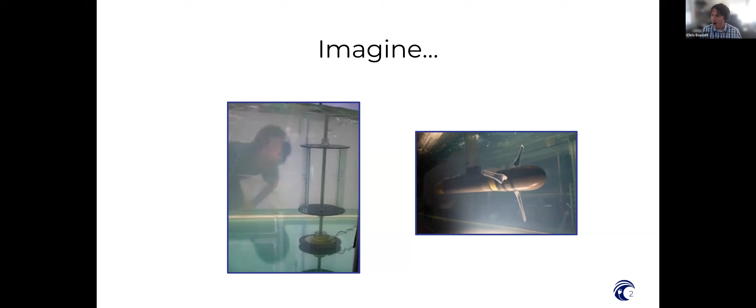Okay, so not a lot of time to think about what's a really big project, but I'm taking a few seconds here to take my own notes and think about what occurs to me. As we move through this, hopefully you can think about what you got right, wrong, what that tells you about your experience in these sorts of projects. So I'm going to do this in three chapters, thinking about the road from this concept, taking that idea and getting into operations.

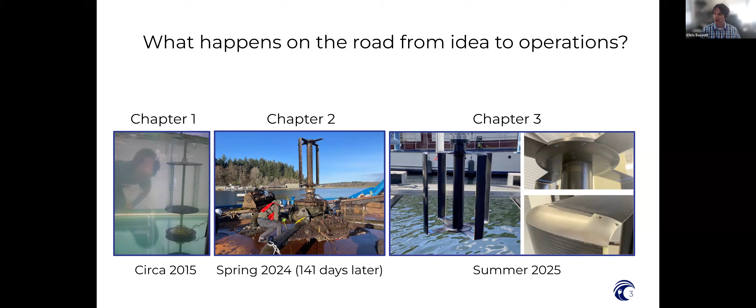And transition them to what we hope is a better performing system that we hope to deploy. I'm going to do this with more random stories and not get into a couple of technical details, because my goal here is to encourage especially some of the earlier career folks to think outside the box, maybe not as much about marine energy and performance, but all the other things you need to learn and carry with you as you execute on these projects.

So stepping back, chapter 1 is really all about this timeline. Around 2014, 2015, over a decade ago, Brian Polagye's team, grad students Ram Cavagnaro, Dom Forbush, Hannah Ross, Ben Strom, and probably others I'm forgetting, were basically in the lab working on cross-flow turbine hydrodynamics. And someone, I wasn't around for this, proposed the idea of doing a proof of concept demonstration.

This is really about the story of how that happened and what the timeline looks like and what surprises you see along the way. This image on the left is a newer picture, but shows a cross-flow turbine experiment in the lab. We started with that concept roughly around 2015, and the subsequent five years were spent developing that concept and aspects of the design, performing a site assessment to figure out the right place to do the work, and beginning to fabricate this stuff.

By the time mid-2020 rolls around, the project's in decent shape. Most of the components are in place. Other components remain to be fabricated, but there hasn't been a lot of testing of the system. So that's going to come in the subsequent years.

Around late 2021, we're in pretty good shape. We're ready to go to the field fairly quickly once we get our permits. Unfortunately, the rest of that timeline takes us a couple years down the road, and we finally get to put this in the water in 2023.

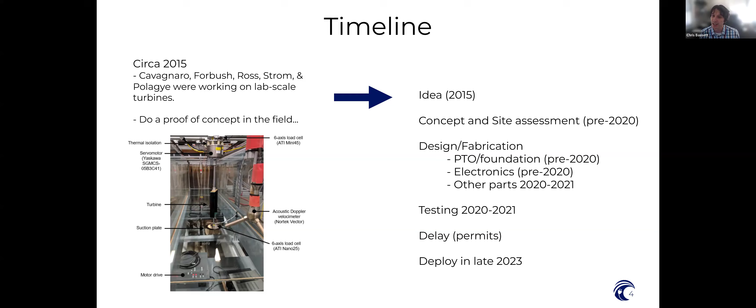So if you're a grad student now, and came up with a concept, you might be able to move more quickly than this, but I'd keep a timeline like this in mind. You're talking many years before you're reasonably going to execute on this, for many, many reasons, and I hope to talk more about those now.

So the Turbine Lander is this. This is the object, test article, whatever you'd like to call it, on the Seahorse, which we use to deploy the unit. It's creatively called the Turbine Lander, because it has a turbine centered in the middle, this four-bladed cross-flow turbine, and it sits on a gravity foundation or bottom lander. This unit is about 4 meters on each side, and its height is about 2.7 meters above the seabed.

Basically all of the components needed to run this system are packaged up in various housings right here. In the back left corner, you see a white object with a bunch of parts on it - that's an environmental monitoring system, which I'm not going to talk about anymore today, but that was a big part of this project. What I'm going to say about the operations is very limited.

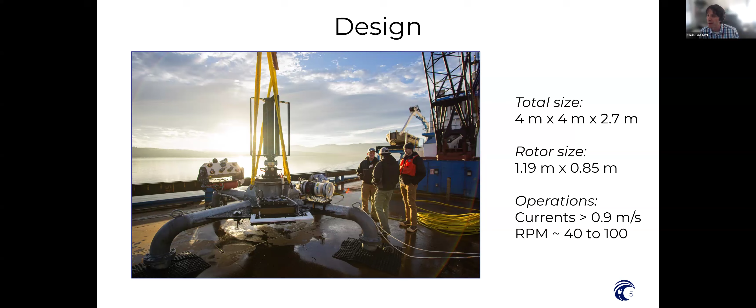I will note that we operated the turbine when currents at the site exceeded 0.9 meters per second. Under those conditions, the speed at which the rotor spun was about 40 to 100 RPM. So that's just to provide a bit of context for the operational characteristics of this unit.

So that's a very small amount of design detail about this. We're going to get into some more as we proceed here, but I don't have time to get into everything. If you're interested in the design details, constraints, and efforts to characterize this unit, they're described in a paper that is open access. In particular, if you're really interested in design stuff, the supplemental section, which is as long as the paper itself, really gets into the weeds on this. So if you find yourself looking for more, go find that later.

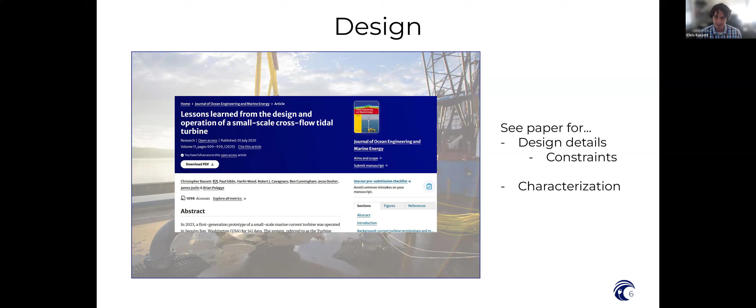Okay, so I skipped over a lot of the process here, and that's okay. We're going to dig back into that a bit later, but I want to talk about some of the unforeseen challenges you might run into as you try to take a project to the field.

Permitting was one particular challenge we faced - I'd say more of a time constraint than a challenge. Our work began in earnest to get the permits to do this work in January 2017, where the effort to deal with a biological assessment began. That was done with Cam Fisher at 48 North. That process played out, and we received a categorical exclusion, basically giving us most of what we need to deploy this device, in September 2022.

However, there was one remaining challenge on our hands, which was that the Washington DNR required an aquatic lands easement. So we filed our paperwork to do that, and eventually got that paperwork back in January 2023. Unfortunately, I cannot sign that document - that's above my pay grade. So our paperwork went into the capital projects office here at UW, where people wrangled over what to do with an aquatic lands easement, in an office where people normally spend their time thinking about acquiring land and building buildings.

There was a lot of emails back and forth about what this means and how this process works. Eventually, it gets signed, everyone is ready to go, and that's in June 2023. But with such a long project timeline, so many times I had planned to put this in the water earlier, only to have a new barrier come up in its place. So I decided, no more efforts to organize until I have all of the paperwork together. That happens in June 2023.

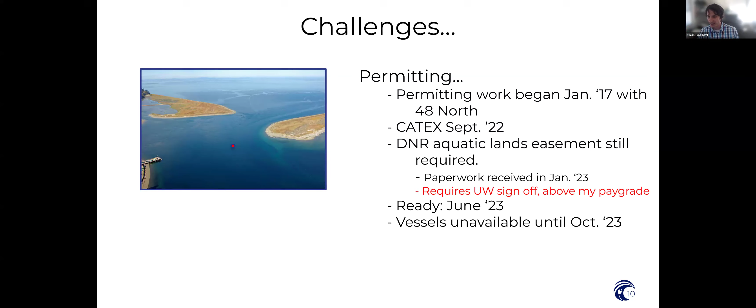I start making my phone calls to vessels to get this in the water, and I can't find anyone to deploy until October 2023. But the good news is that's when we finally got around to doing it. So that was exciting.

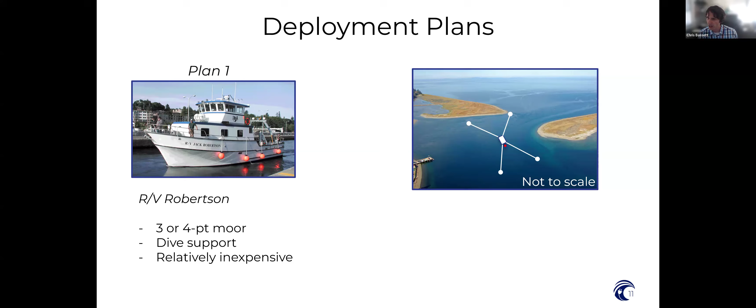Unfortunately, a lot of the discussions around this happened before I became PI on this project, and when I went to organize this, there were a lot of reservations about it. For one, there's a partially exposed cable on the seabed that runs nearby, and if we were going to put the anchors, the ground tackle down to hold the vessel in place, that would put that cable at risk because we could not avoid crossing it. So that's not great. On top of that, there were some operational concerns, and our local operators basically said, no dice, we don't really want to do this - can you go entertain some alternatives? So, short answer to that is yeah, but I wasn't quite sure what to do next.

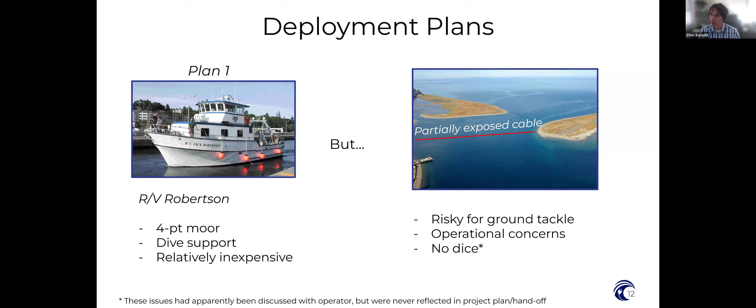Fortunately, people around here had some great ideas, and they recommended this particular vessel called Seahorse, which is a private vessel of a local marine construction company. It's basically a much larger barge, about 108 feet long, with a giant 20-ton crane on it that can lift a large load at far bigger distances than we could ever need. One of the real compelling reasons to work with this boat is it's a spud barge, or other people might have heard of a jackup barge - so instead of anchoring, this vessel has large spuds it can drive into the seabed to hold station, and it can use those to maneuver quite close to the spot where we want to be.

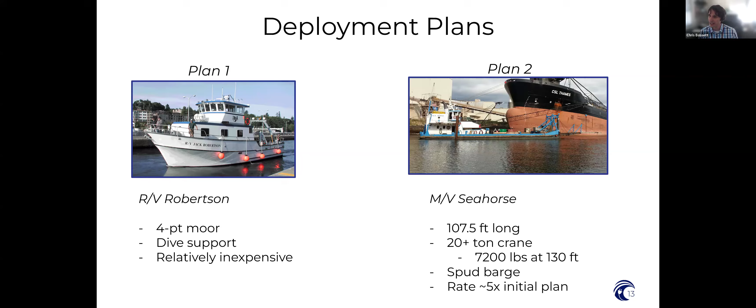So this vessel's great, super capable for what it is, but it's quite expensive compared to our local oceanographic vessel. And then, of course, we need to work around their schedules. Either way, Northern Marine was fantastic, interested in doing this work, and so we decided to do so.

So we had to make a plan, right? We're going to send our device, our Turbine Lander, up to Sequim Bay. And how are we going to do it? We decide that the most appropriate way to do this is to build the Turbine Lander, fully fabricated here on the dock at our oceanography department, because there's lots of space, there's heavy equipment there, and we have access to the power we need. And we can build that in advance.

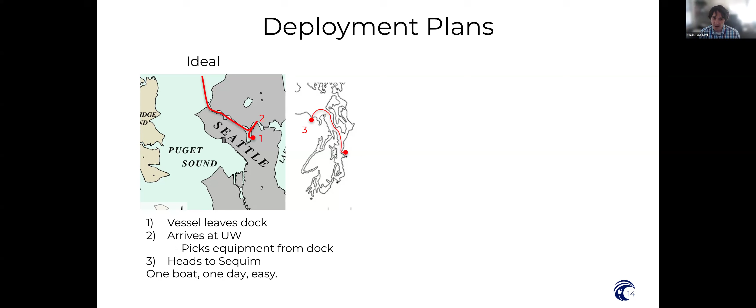And then the vessel will leave its point of moorage, which is in Lake Union, right nearby UW's campus, and it's just going to steam a few minutes north to UW. Using its giant crane, it'll just pick it right off onto the deck. From there, it can leave out from Seattle into the Puget Sound region, and based on the map on the right, drive up over to Sequim Bay there, and we can meet it. And that should all go nice and easy, no hiccups, right? Well, wrong.

The reality looks a lot different than that. So, the vessel itself...

While we were preparing for deployment and assembling this at the oceanography dock, less than a week in advance, I get a call saying we have a problem. Our vessel is too big to go in and out of the small lock. We have to use the large lock, and the Army Corps has announced a long-term closure to do maintenance. We're basically trapped out here for the winter because we're busy doing work for the Navy and can't make it back before they close. We need a new plan.

They asked, can you just take it apart and drive it up? I said no, that's going to be like a week of work, plus we've already tested the system or we're getting close. That's not going to work. We don't have time for that.

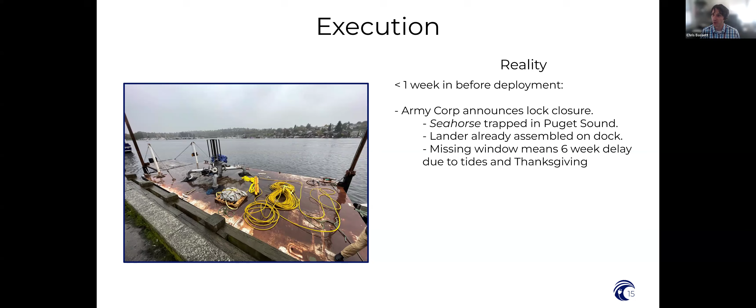If we miss our window, we have a huge problem because we don't have another opportunity where the tides are suitable, and there's not a holiday, for over 6 weeks. So we're going to lose 6 weeks of our deployment if we can't find an answer to this.

So we quickly figure out that instead of the original plan, they can send over a small barge. I contract with a local boom crane to come into the oceanography dock early in the morning, lift our equipment onto the barge, and transfer it there. Then at around 0800 we'll go out of the small lock with the barge to load onto the other vessel.

But the boat gets to the small lock after we do, and the small lock is broken. The pumps are not working, so they can't get the vessel out.

It's dumping rain this morning, very cold, and this vessel has no interior—there's nowhere to hide from the rain. So the poor crew is just sitting on this vessel getting poured on in cold weather for hours, before finally they make it through the locks midday.

They're able to perform that equipment transfer at sea and get the vessel up. As you can probably imagine, this is all very stressful, done on short order, and none of this is a planned part of the budget. So that's just what happens when you do field work, maybe.

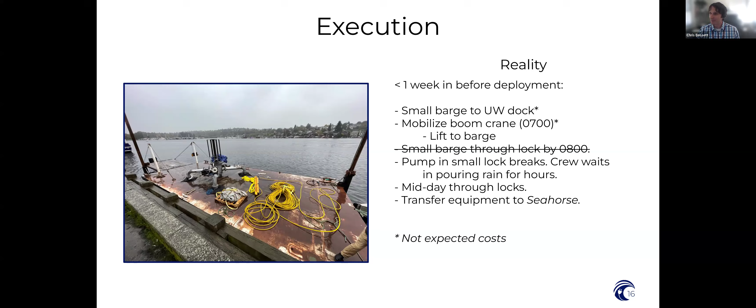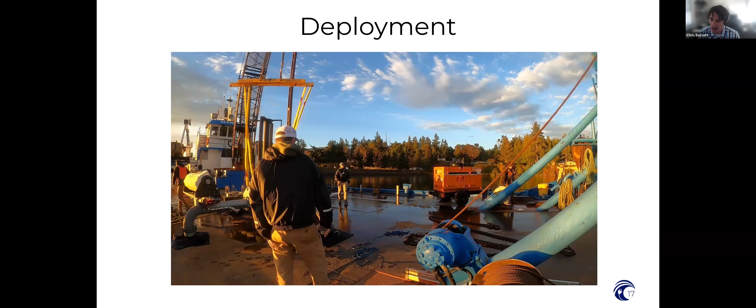Either way, we did successfully get our equipment up, and the following day we were able to deploy our equipment in Sequim Bay. So in the morning we're all ready to go and we pull up anchor. Here on deck, I have the Turbine Lander ready for deployment.

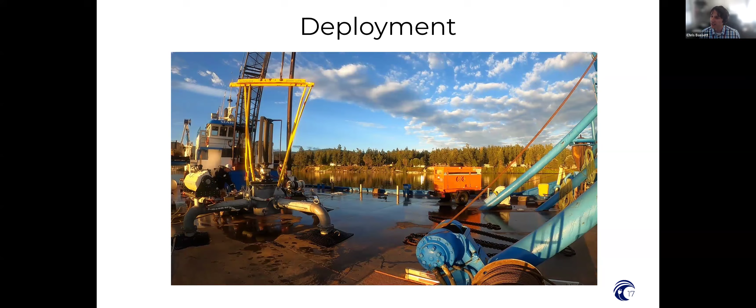We would come up with something maybe more complicated, but the water up there is actually quite shallow, only about 8 meters deep. So we can basically pick the Turbine Lander right off the deck with some slings and a load spreader and send it down to the seabed, and we want to secure the cable on the site anyway.

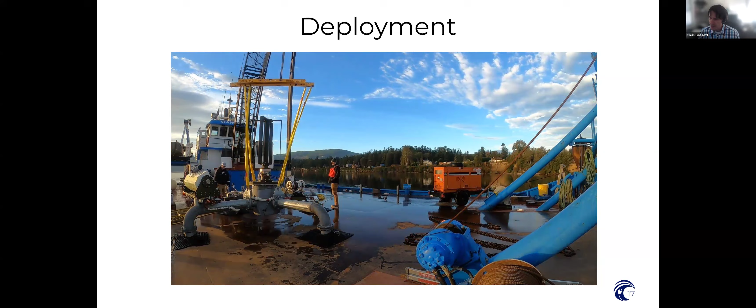So we want to send divers down, and we might as well just have them unshackle our equipment once we've tested it and we're comfortable with it on the seabed. So here we're just preparing to put this in.

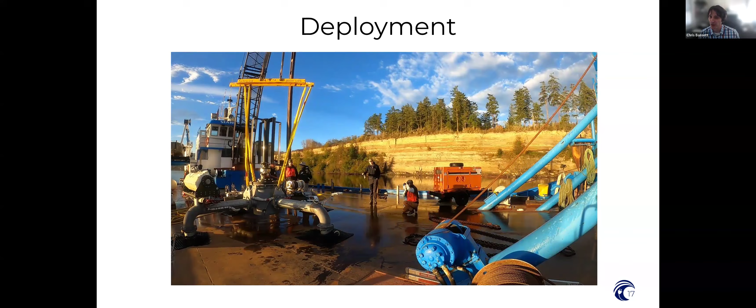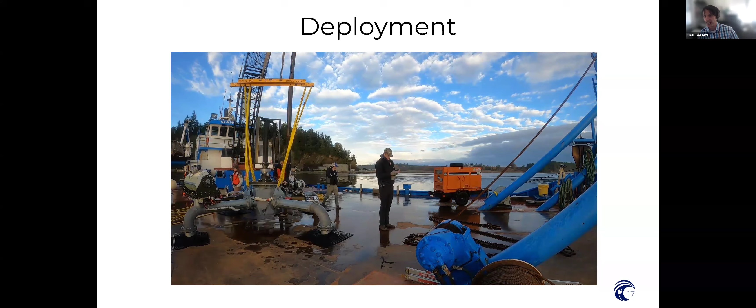We were in the interior of Sequim Bay in the morning, and this is the vessel basically just heading out to the site. That's PNNL's facility in the background. We're just preparing to get this thing in the water and doing all the things you do when you're ready for an operation.

Now we are on site, and our job here is quite simple: we just want to set this thing down on the seabed. So it's all rigged to be picked up.

But one of the things we wanted to do is make sure the environmental monitoring package, shown on the very left side of the foundation here, is oriented perpendicular to the direction of the flow.

So we sorted out to have another vessel come in with a large tagline and take some tension on that tag as we lower the vessel down to the seabed, so we can get that orientation of the platform right on the seabed. Pretty crude approach to it.

It turns out it worked really well, at which point the cable, which is on deck here—about a 160-meter cable—basically gets spooled out back to the facility, and divers go down and secure it to the bed.

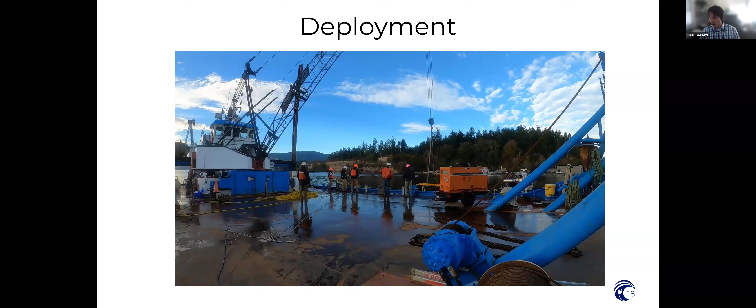All of our equipment remained comfortably in position following that for 141 days. So there you go, that's a pretty quick idea of deployment operations and some of the unsurprising things that happen.

They are unsurprising, but unexpected. So here's one of the only looks of data, actual power generation data I'm going to provide from that, because I want to focus on lessons learned and what we did next.

So the top figure here is current measurements for a good portion of that deployment period, and the y-axis is the inflow velocity at hub height. What we see is it's fluctuating down and up several times on a daily basis, and showing these broader temporal patterns associated with the spring neap cycles.

Key here is that the peak velocities at the site are about 2 meters per second, a little bit higher at hub height. This bottom figure here just shows the power, electrical power generated by the turbine throughout the deployment period.

Note that not all the powers are positive. A negative power means we're providing some power to the turbine to keep it moving, and this is actually happening quite often. The reason for that actually makes a lot of sense, I think, when you think about it.

We'll talk about it in a minute, but we went through pretty extensive characterization of the turbine before we put it in, and at that point we had realized some of the inefficiencies in the system that could be addressed with the second generation system.

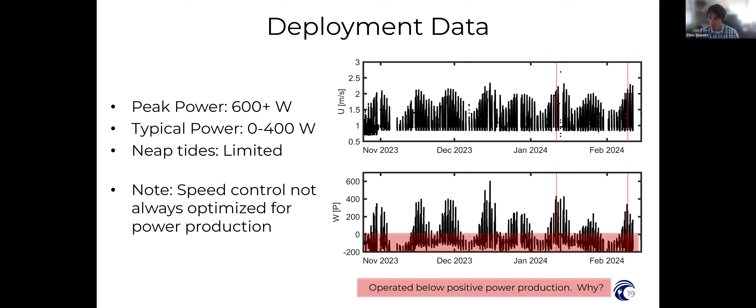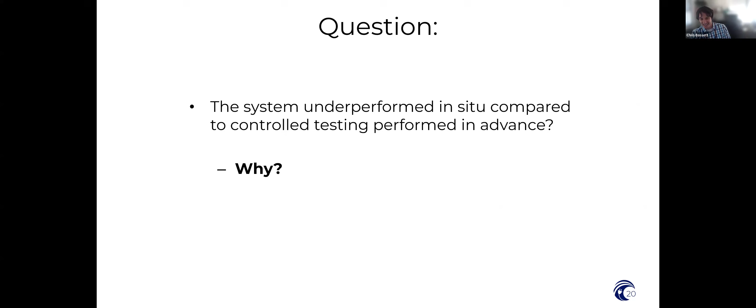Okay, so another quick prompt here. I'm going to give you a few seconds to think about this question: our system underperformed in situ when it was deployed compared to control testing performed in advance. Can you come up with one or several reasons why you think that might have happened? Then we're going to talk through it. I'm going to give you 15 seconds. Okay, cool. Sorry, I know that's not that much time, but it's worth taking a second just to think what might not be going the way you expected, because some of it was surprising to us.

Biofouling was the first real big challenge we noticed, and we noticed it within 48 hours. We had cameras and could view the system in real time, and we noticed very quickly that we were having several problems. The first was eelgrass was getting caught in the blades and basically the blade assembly.

There were some small cracks in it, and those were basically large enough, even though they were less than an eighth an inch, for eelgrass to get caught in there and turn the blades into sort of like bearded objects floating around. That's not helpful.

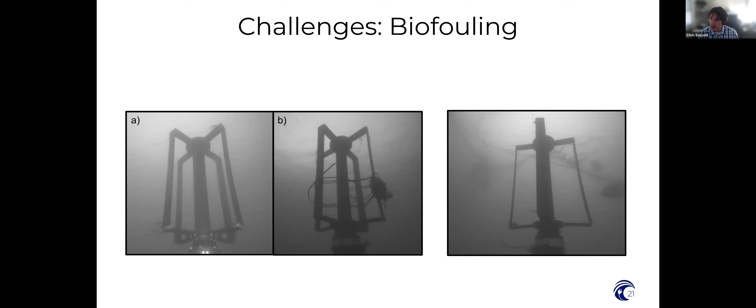These examples where kelp got trapped around typically would come off within a tidal cycle, but these examples where eelgrass got stuck, it would stay there for quite a bit of time before it would come off. And so biofouling, you can imagine all that plant matter out there is really interfering with the hydrodynamics, creating extra drag and reducing the performance. So how do we determine that? What do we try to do to figure out what the impacts are?

Lacking other good options, the approach we took was to find a period where the rotor is not fouled, and currents are basically zero near slack tides. We would step through a set of RPMs and measure how much power it took to drive the system when it wasn't biofouled. Then we would repeat it when there was fouling and compare the two to see what the net difference in power requirements was.

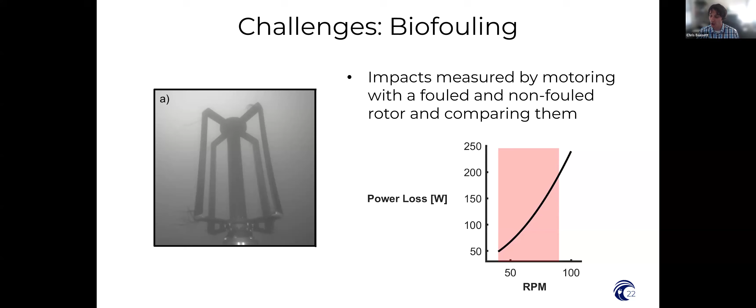The short story is that even in moderate cases of fouling, we see 50 to 200 watts, depending on operating condition, chewed up just by the presence of the plant on the rotor. That's not great when the target average power output for our turbine is on the order of 100 watts. That's a significant loss. So biofouling definitely interfered with us and motivated us to make changes going forward.

Another significant challenge we had, and this might be my most technical slide, is turbulence. On the left here we have a pretty typical measure for the performance of a rotor. The y-axis is the coefficient of power, and the x-axis is the non-dimensional rotor speed. The coefficient of power is defined on the right: basically the mechanical power of your rotor in the numerator and the inflow power in the denominator, and this represents your rotor's efficiency.

One thing to notice about this particular curve is there's a peak right at about 2. If I move significantly off that peak, my overall efficiency drops rather rapidly. That should be a sign that a system like this is going to struggle with performance if you can't keep it operating at the state you want it to be in.

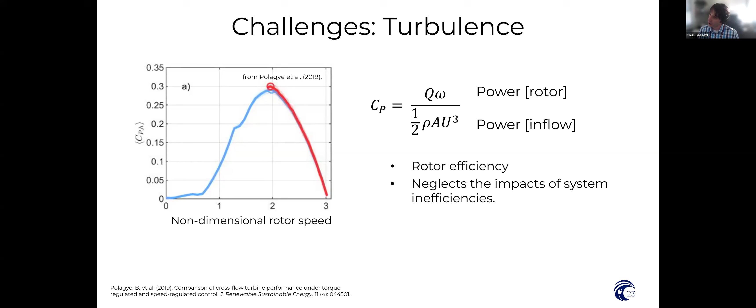My question is, if I'm trying to maintain constant control of the rotor, meaning it's moving at the same speed, what happens if my inflow velocity changes and I can't respond to it? It has great implications for our performance.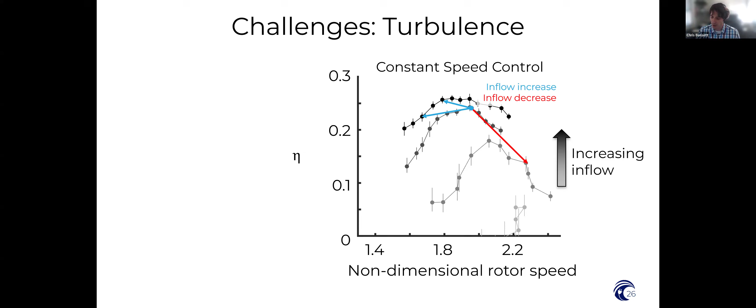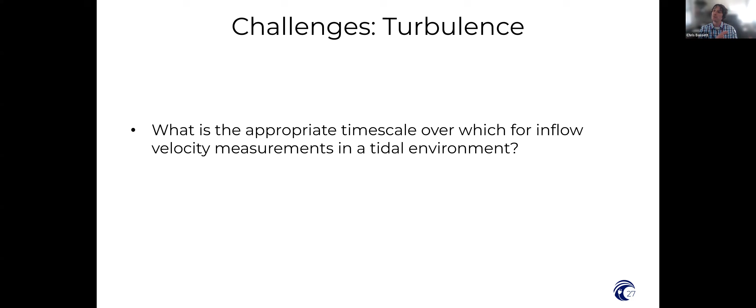When you're operating and trying to control a device, it's appropriate to figure out what time scale you need to use to control it. Tides themselves, in an aggregate average sense over 2 to 5 minutes, the mean currents don't change a lot, but there are turbulent fluctuations of varying timescales in the middle. If I could track those perfectly, that would be ideal, but it's really hard to do. If you can't do it well, you might always be chasing conditions that no longer reflect what the turbine is experiencing, and this is ultimately the problem we had.

This is 5 minutes of data. The top plot shows three things: the velocity on the y-axis, and the red line shows a 2-minute moving average used to control the turbine. The black and blue curves show 6-second averages, good enough to get a statistical sense of noise, but still capturing fluctuations in the inflow.

When we take those measurements, what we actually see here is these wild fluctuations in the inflow that are happening on the scales of seconds or under a minute. So we are not fundamentally tracking those velocity fluctuations.

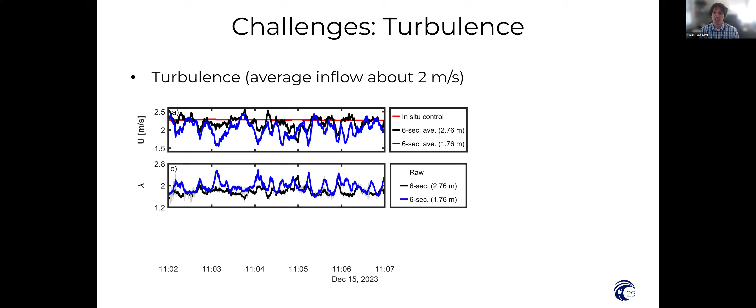This non-dimensional rotor speed, shown here in this plot, is optimized at about 1.9, which we hit okay with the upper part of the rotor, but for that lower part of the rotor in the inflow, it's varying wildly.

That means part of the turbine is just not operating that efficiently while we're out there. The end result is we end up with wildly varying inflow conditions that really drive variability in power production. If there's less turbulence, or we can track it, we can do well. But if we're just working off that mean flow speed and don't have a good way to account for that, we might struggle with power generation. This points to a need to change things to do better control.

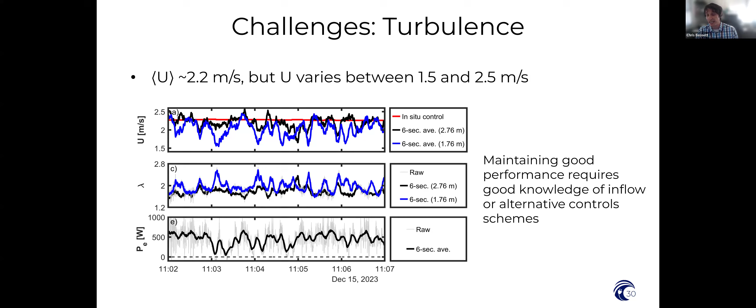Next challenge, mechanical losses. Before this system was actually deployed, we did some laboratory-based characterization to measure the assembly's friction of all the components — how much is being lost when we just spin it in the laboratory.

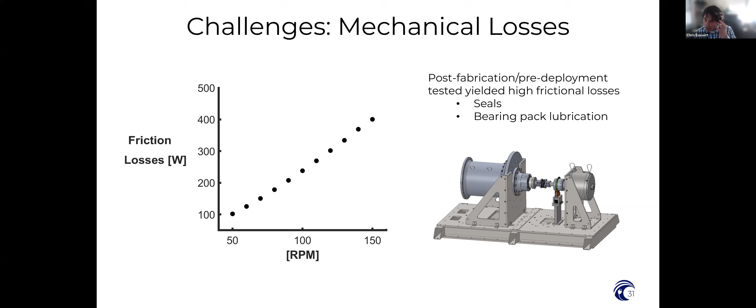So that's what this plot shows. Most of our operating space is covered by 50 RPM to 100 RPM. We're seeing losses associated with baseline friction on the order of 100 watts up to over 200 watts. That's not great. And those losses — the primary contributors are seals and basically the lubrication that we have in the bearing pack. So this is a problem we ultimately want to solve.

I'll get to it in a minute. But another challenge we identified was a blade failure, which I mentioned earlier. In this upper figure, I'm not going to get into too many details, but I want to point out we have this complicated assembly where we have an aluminum strut that comes in and attaches to the blade, which has a titanium hinge, and there's a pin that holds those components together.

And that pin is held in place by a fastener. So we had a blade failure. When we recovered the system, we didn't know what happened, so we wanted to do some forensic engineering.

The information we had available was that we'd been recording sound while we were out there, and we heard an impact. We know something, in the case of both events, hit our turbine and caused a lot of noise, but we don't know precisely what that was. When we dug through and looked at the blades that still existed and the ones that failed, we didn't see any telltale signs of fatigue. So that suggests something about the mode of failure.

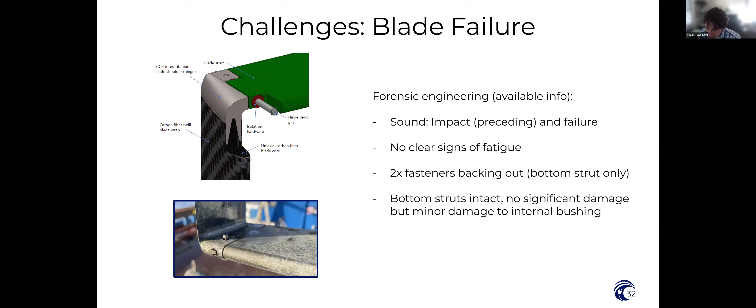When we recovered the system, we had two blades missing, and the bottom of both remaining struts — the fasteners that held the pins in place — had more or less backed out. Not a great sign, because if those back out, we lose our pin retention mechanism. And the bottom struts that were intact on all of the different blades had no significant damage, suggesting that the blades just came loose.

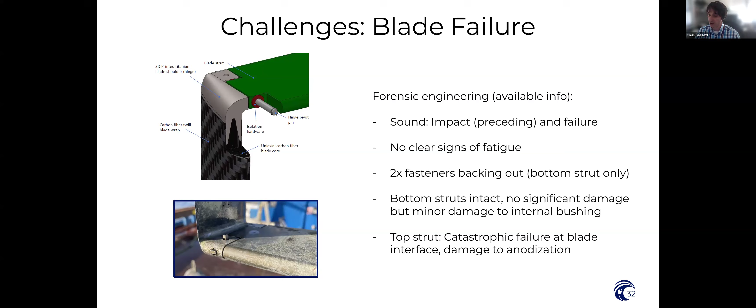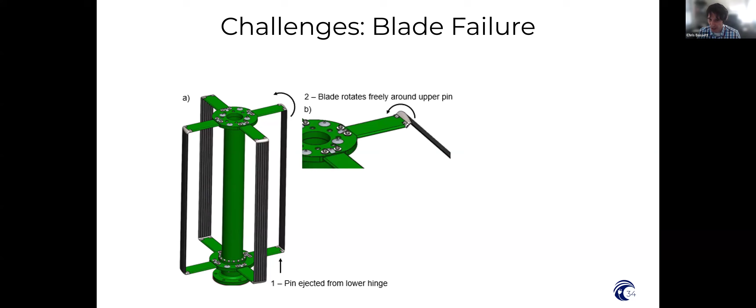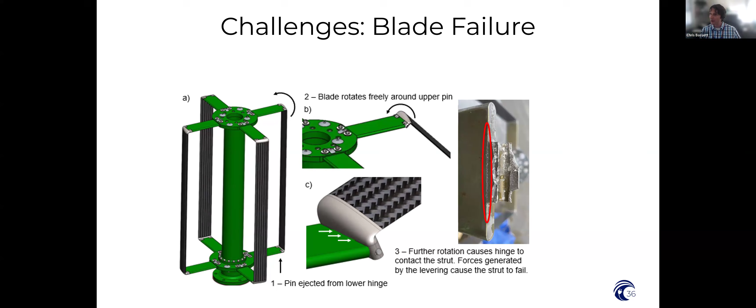However, the top strut had catastrophic failure, which I'll show next, and damage to the anodization. So the story we were able to pull together was that essentially, as shown here, the lower pin basically pops out of that hinge. When that happens, the blade is free to rotate up freely. Eventually it spins over enough, and the titanium hinge makes contact with the strut and cams the pin right out of the retention mechanism, and you get a broken strut that catastrophically fails and looks something like this. So, an interesting problem to have, something we will keep in mind for our future designs.

Okay, so I just spent a huge amount of time before I'm even at the next generation, but I think knowing what to do in your next generation, you have to understand what went well and what didn't the first time you went out. So our goals here are to increase power production. We have two ways of doing that: we can enhance our rotor performance, or we can basically mitigate our losses. We know we want to do something to fight against biofouling, especially the eelgrass that's getting stuck in the blades, which is something that's preventable. And we also want to increase its survivability.

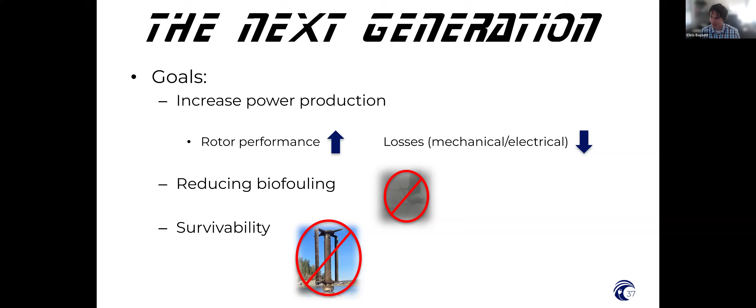We don't want any more broken blades, right? So our approach is summarized pretty briefly in these coming slides.

First of all, we have 4 seals in this system. Inside our generator housing, there's a seal on the generator. This generator is typically used on factory floors, so it has a dust seal to keep dust out. Do we really need that? The answer is no, we don't, and so we can get rid of it. We hadn't initially because it's a really expensive generator, and it's generally frowned upon to immediately void the warranty on really expensive equipment right after it falls into your hands. So we avoided doing that until we understood we had something good to work with here.

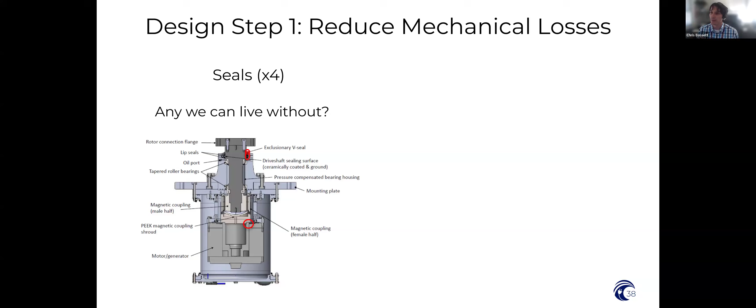On top of that, we have 3 seals located in the assembly that faces the water. Those are basically there to keep our lubrication in our bearing pack, and also to prevent the intrusion of sediment and seawater that can foul up our bearings. So those exterior seals aren't things we can do without, but we can remove that seal on our generator housing. It turns out that simply doing that buys us back about 50 watts.

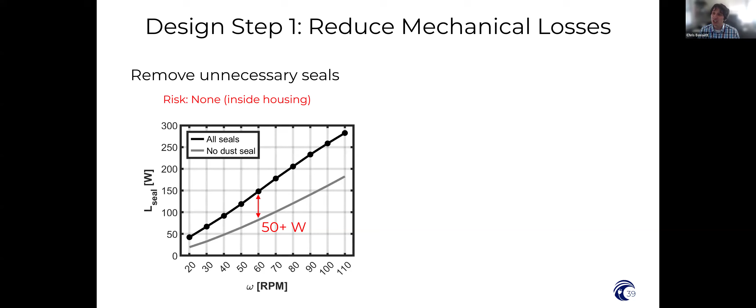Here are 2 lines showing the losses from operating the system with all of the seals installed, and then again once we pulled out that dust seal. As a function of speed, we see it increases a little bit, because frictional losses increase as speed increases. But generally speaking, we're looking at 50+ watt offsets just by removing that seal from the generator housing. That is a huge gain from a relatively small task with relatively little risk.

The second issue we can try to mitigate losses on is our bearing pack. The bearings are basically protected, sitting in this viscous layer of biodegradable oil. Much of the chamber they're sitting in is quite narrow, at its narrowest as little as a millimeter or less. And because part of that's moving and part of it's not, there are viscous losses happening due to that shear. So we punched through some calculations for you fluids folks out there, treating this as a multi-chamber Couette flow, and integrated our estimates for the power losses.

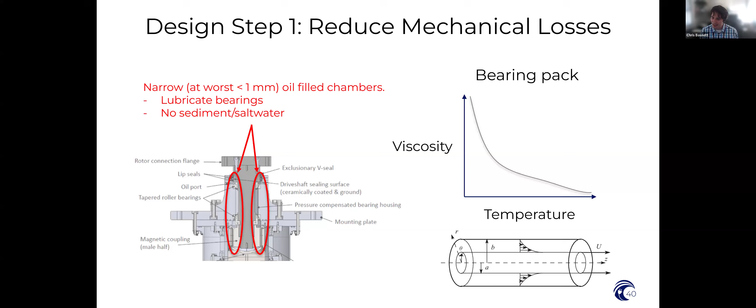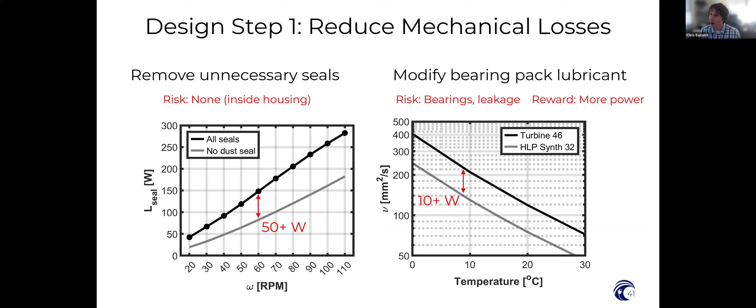In the end, we figured out that by just decreasing that viscosity, going to a lower grade oil, we could buy ourselves back another 10 watts or so under most of our operating conditions. So not nothing, but also not a lot. The risk is that our bearings are already sitting in a lubricant that has a lower viscosity than their specifications. We have decided that is a sacrifice we are willing to make to try to reduce our losses. The lower viscosity oil could increase the potential for leakage of seawater and sediment getting in, but again, a risk we're willing to take for the reward of a bit more power.

Another thing we did in this rebuild was look at our power electronics. The initial system was really proof of concept, and one thing they did not want to invest heavily in up front was developing a custom power electronics solution for this system. Instead, off-the-shelf industrial automation power electronics with supporting tools were used to drive the system. This stuff is fantastic for data acquisition, and it has a lot of flexibility like you might want on a factory floor.

So it's a great fit for a proof of concept study. However, we realized these were consuming a lot of power, they're relatively expensive, and they're relatively big, so we wanted to move away from them. To do that, we collaborated with MBARI, who built the MBARI-WEC, and their WEC has custom power electronics in it. It turns out our systems have remarkably similar needs, and we were able to adopt their power electronics with just changes to software required. There were almost no changes required to the hardware in order to integrate and work with that system.

The benefits of doing this: instead of having two large housings—those housings shown in the images on the left, you could bathe an infant in them, they're big enough for that, they're not small—instead of having two of those, we now have a power electronics package that fits within our generator housing.

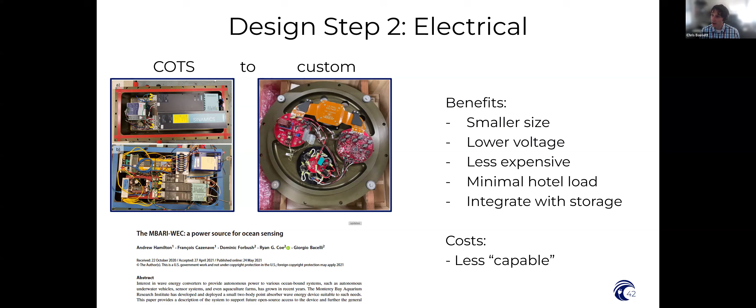We can't acquire the same quality data and provide controls at the same sampling rate as our prior stuff, but it's still fantastic. Finally, a couple of things we did in terms of design was we said, hey, what can we do about the rotor design? We have two fundamental limitations we cannot violate. The first is the loads on our bearings, and we are sitting dangerously close to those under our design conditions, so we can't fix that.

Furthermore, we can't increase our rotor size significantly because we're already pushing up against the overturning moment limits on our rotor. So maybe we can squeak about 10% in terms of a change in the size of our rotor out of this, but we can only do that if we change the aspect ratio. Ultimately, that's what we decided to do, but only after going through extensive design analysis to ensure that we weren't going to cause problems for our bearings and overturning moments.

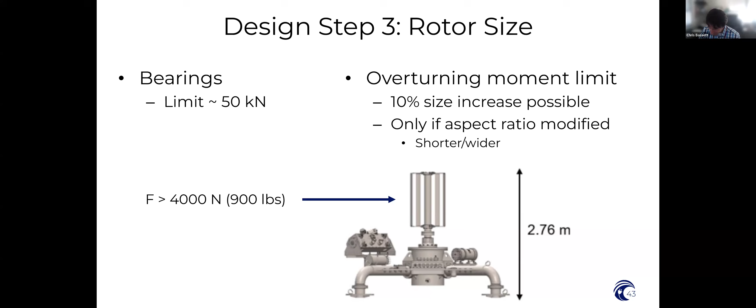I honestly think this is the only part of our redesign that required a significant scope that involved true marine energy expertise. The rest of the work was really driven by our ocean engineering, mechanical engineering, and electrical engineering staff. So we talked about all of the different things that we could change about our rotor, from the foil size to the preset pitch angle, constructions and assemblies.

And in the end, we came up with a relatively small set of modifications: a different aspect ratio for the turbine, a slight increase in the chord to radius ratio for the blades, and then redesigned the foils. We basically did stress analyses to make sure the design was going to be good.

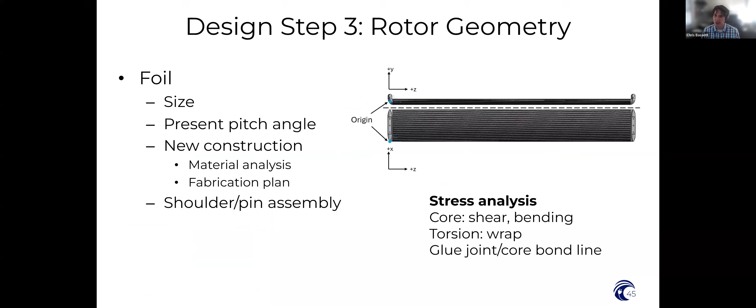And once we felt comfortable with all of that, we pushed forward, found a new vendor, and built these composite foils. We don't have much to say about this other than we built a test article before committing to all this, brought it to the ME building, put it on the Instron, and basically tested it up to 5 times the peak load that it will ever see.

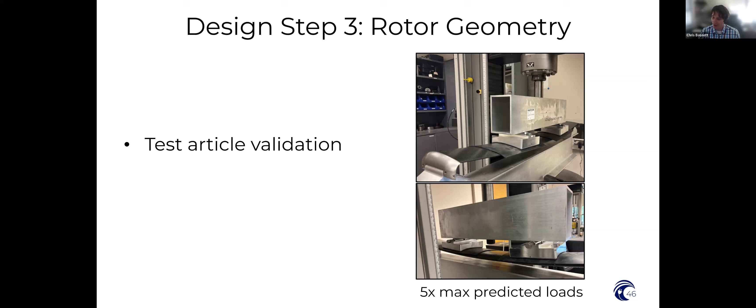This is it with about 2 Honda Fits worth of mass pushing down on that rotor blade, which is deflecting almost 2 inches under that load of close to 6,000 pounds, actually. So the system worked, came together at much higher than its anticipated or planned loads. So that was great.

And the final design steps that we really went through were said, we want to streamline our system. We don't want any cracks in the assembly that can bring in biofouling. We don't want blunt components. We don't want exposed fasteners that are adding drag. And so the design ultimately looks like the system that we have on the right here, where we have a more streamlined system. There are no real ways for drag to catch onto this system.

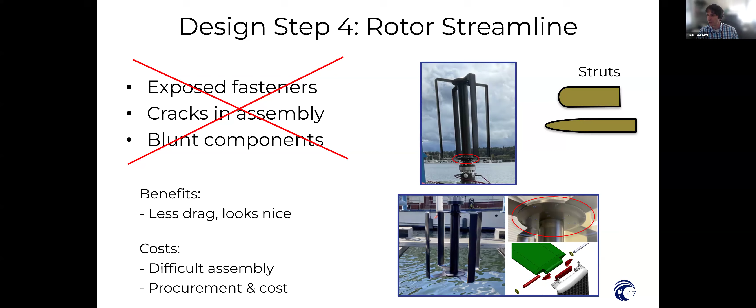And this full system is being coated with an anti-fouling, non-toxic anti-fouling coating that was very successful in preventing barnacle colonization and macroalgae growth on the last Turbine Lander. So the efforts to design this are significant and involved a lot of detailed analyses to ensure that we were not going to design a system that would basically collapse under stress.

So I don't have time to dig into it, but I do want to point into the complicated aspects of these assemblies for people with a vision for marine energy. This particular assembly looks like this. Every color in this represents a different material, and this is built up this way because of challenges with corrosion and mixed metal contact. So we use a titanium strut or shoulder on our blades here and a titanium pin, because that represents the best balance of strength and corrosion resistance that we can get behind.

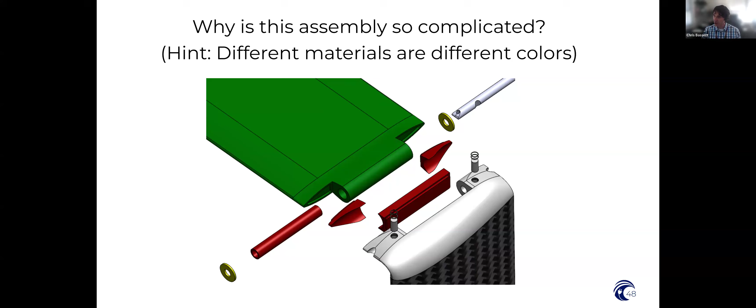We don't want to use titanium generally because it's too expensive, or stainless steel everywhere because it's too heavy and difficult to machine. So we wanted to use aluminum struts. But if I have aluminum and titanium, those don't play well together, so we need to isolate all of these components from each other, which requires complex assemblies to mitigate that corrosion. Something really important when you think about marine energy applications.

In the end, how did we do? Our old turbine had performance curves that look something like this, power on the y-axis and speed on the x-axis. I'll point out the end conditions: at about 2.25 meters per second, we saw about 1,500 watts or less of power generated, and we started generating power at about 1.25 meters per second.

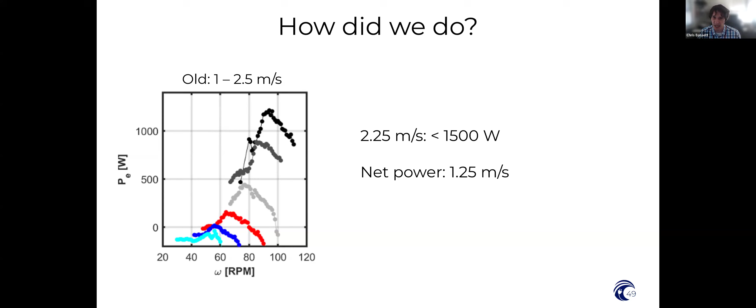Our new rotor looks considerably better. At the same inflow speed, we get over 1,700 watts of power generation. We start generating net power at about 0.9 meters per second, which is about where I believed we could land before we started the redesign process. We've shifted most of our conditions up by on the order of 150 watts, which is huge when you think about how that integrates over an entire deployment. We've also reduced stall behavior, so we can move to more complex control algorithms that help us break free of those speed challenges and turbulence issues I talked about before.

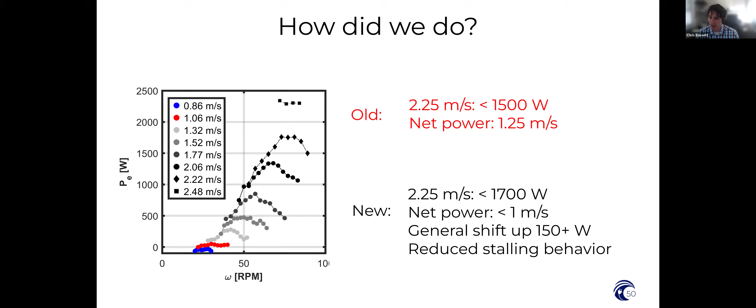So we did great. We're going to redeploy this year. We hope you'll follow us and are excited to hear about it.

I'm going to close with a couple words of unsolicited advice to early career people here. If you want to stay in the space and work on field prototypes, it's really important that you know your marine energy. Coming up with an idea that's going to perform in situ is 100% dependent on your understanding of the hydrodynamics, the conditions, and things you might focus on a lot in laboratory research. However, when it comes to executing a field-going project, your ability to navigate the marine energy space is actually a really small portion of what is required to get it done.

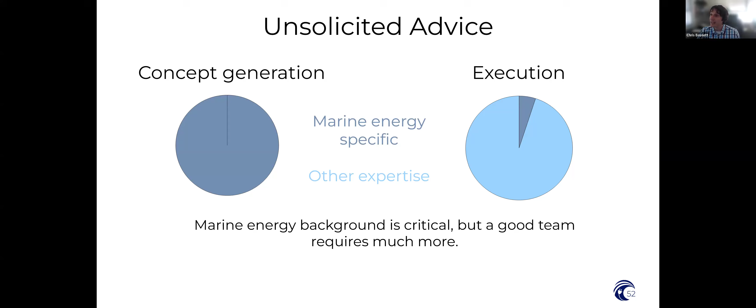It requires a huge amount of other expertise and being able to talk with other people who are ocean engineers, experts in navigating the regulatory environment, maybe oceanographers. My recommendation is to recognize this complexity and approach these projects in a couple of ways. One, reading about other aspects of the industry and getting to learn more about things that may feel less relevant to your immediate marine energy research. It's tremendously helpful to be conversant in many other areas.

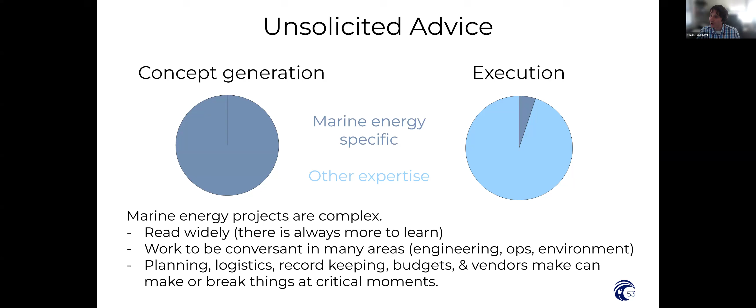Engineering-wise, you want to be able to revisit derivations with engineers, talk about what they're doing, communicate with operations people who understand how to get stuff in and out of the water, and understand the environmental stressors and issues you need to navigate with these projects. Finally, work on planning, logistics, record keeping, budgets, and expand your network of known vendors you can trust to help make things work. That stuff can make or break a project at critical moments, so learning how to do that and investing your time and energy in it is critical to your future work.